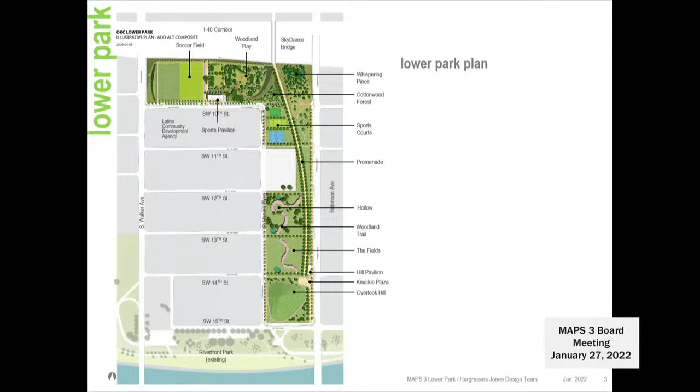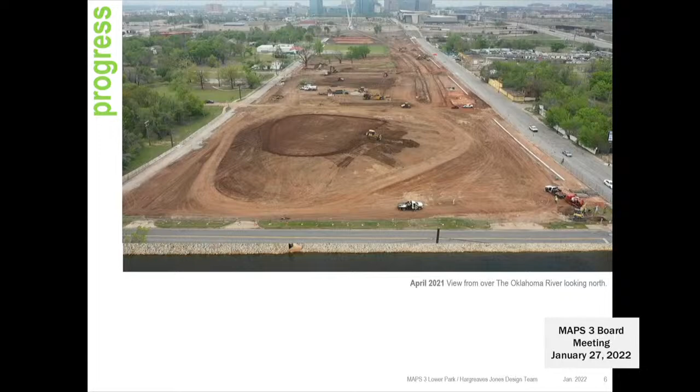I'm going to briefly talk about construction progress, and then a quick overview of the change order, the next item on your agenda. I'm happy to report construction progress has been very good. We've had a lot of luck with weather and no delays from utilities or underground obstacles that we were blessed with last year. This is earlier April last year to show how far we've come, where earthworks was underway, and September last year, where we got a little bit of sod on the hill.

These are drone images as we fly over, from south to north. We're flying over the hill here. You can see the promenade concrete work, some benches coming to the ground, the Hill Pavilion on Robinson Avenue, the meandering mid-block pathway, and the gray object is actually a rain garden that has no topsoil in it yet, which is why it looks gray.

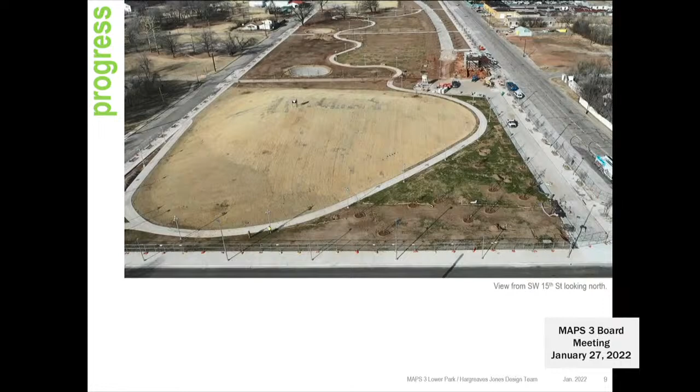We're flying over the middle of the park, looking at the large rectangles, which is the sub-base underneath the sports courts in the foreground, sized for 2 basketball courts. The middle ground is 4 pickleball courts, and the area with some gray is the futsal court, a very small soccer field.

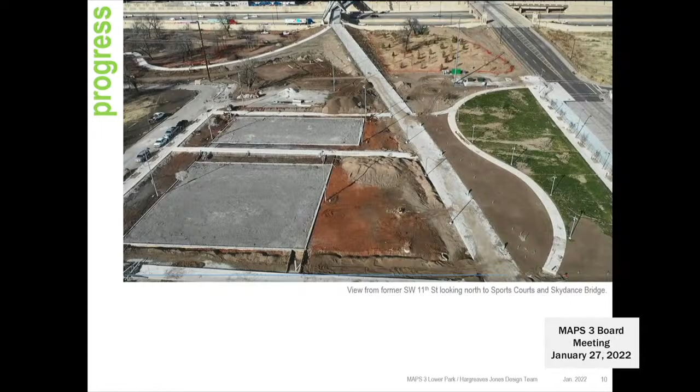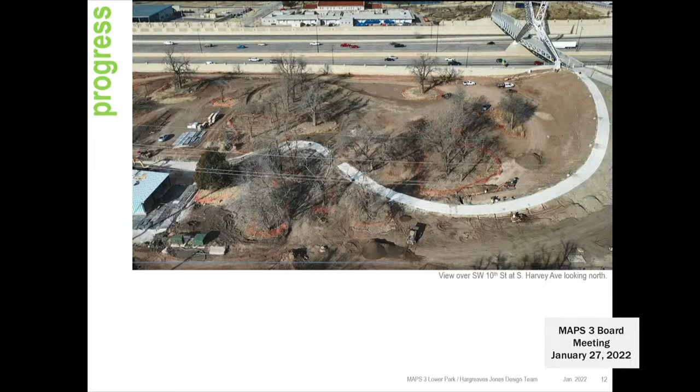You can see Skydance Bridge there, the path coming down from Skydance and heading west through the existing trees. We're flying over closer to Skydance, and you can see some of the irrigation going in. Moving west, you can see how that pathway moves underneath the trees, and the workers are busy in that area now. You can just start to see the sports pavilion, and here it is.

It is roofed in, the warmest place to work on site right now, so it's coming along very nicely. The last area to be completed will be the soccer field, which is that orange clay color there. We are receiving a donor contribution for the aggregate base, and that will probably go in the next 2 months.

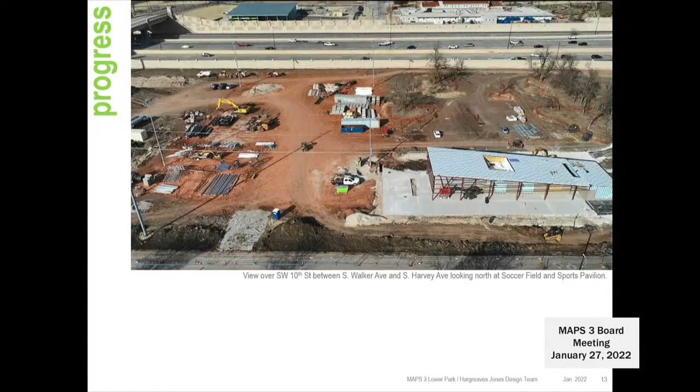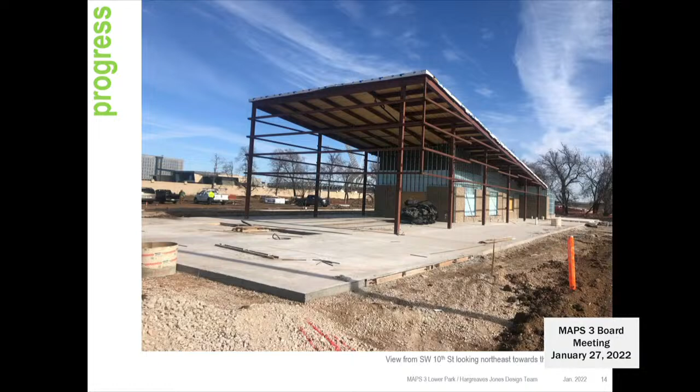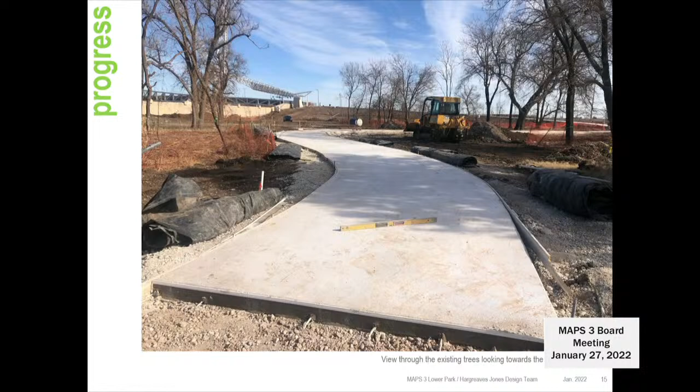So as we walk around on the ground, going backwards again, this is the sports pavilion on 10th Street, the framing of it, and the walls going up now. Concrete slab is down. The meandering pathway up to Skydance through the existing trees, which we spent many years saving as many trees as we could, and we're hoping to trim the damage from the ice storm off before spring as well.

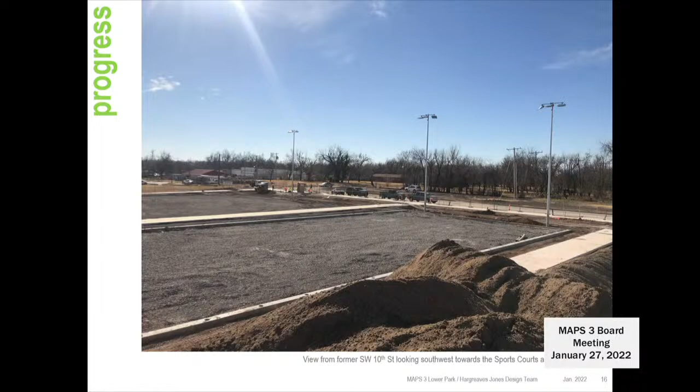Here we are looking at the sports courts, the pickleball court in the foreground, and the basketball courts in the background, on the promenade. It's very much a continuation of the upper park. You can see the normal lights on the left-hand side, and on the right-hand side, the bases for the stainless steel light masts by the art sculpture.

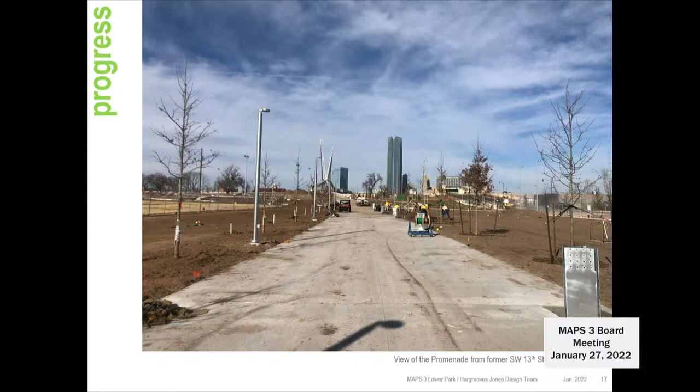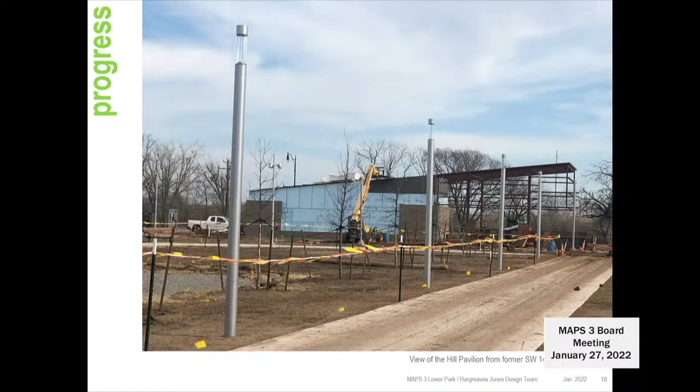This is the Hill Pavilion, the second building on the site. It's coming up nicely as well, a little slower than the sports pavilion, so as they finish the sports pavilion, you'll see this one be clad rather quickly now. This is the little plaza area next to the Hill Pavilion, which will be a location for public art.

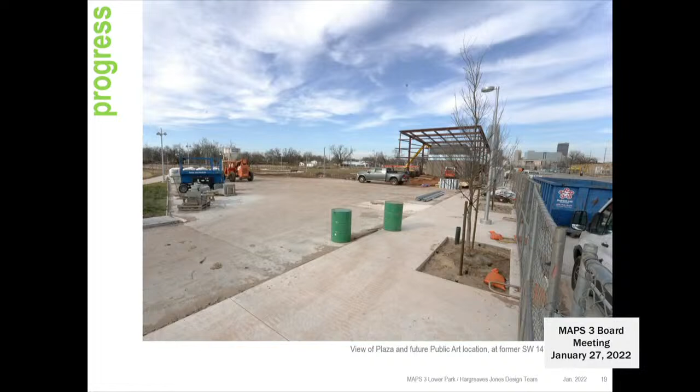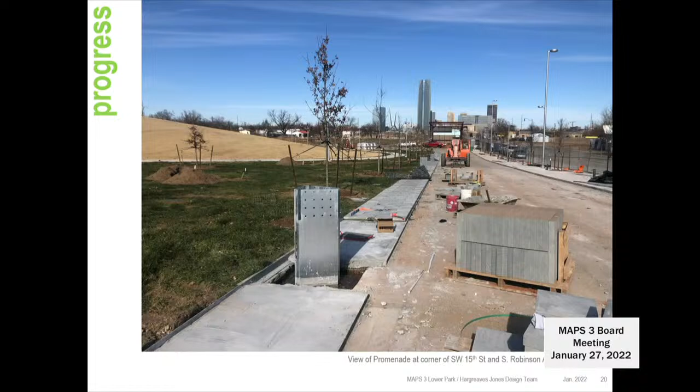And as we head south again, the stonework is just happening now for one side of the promenade, and concrete unipavers are soon to start. So progress has been very good, and we hope to continue with that through this year.

Just to give you a rundown of the change order, there's 6 items on this change order. The first 2 are credits back. One is to do with the earthworks balance - we were able to find places to use more dirt on site, so there's some savings back to the project. We were also able to value engineer some of the reinforcing in the sidewalks, and there's a credit due back for that. Item number 3 is relocating a valve out of a proposed curb cut ramp to ensure accessibility across the streets - there's $1,500 for that.

Item number 4 is to find newly laid OG&E utilities. Unfortunately, they did not put them where they said they were going to put them, and we've had to go find them. So there's a charge of $2,775 to locate those utilities.

Item number 5 is upgrading the security cameras. Since we did the upper park, City IT has changed the type of camera they use throughout the city, so we're upgrading the cameras themselves. And in discussions with the operator, they requested 3 of the cameras be removed and relocated from what was going to be attached to the buildings out into the park to get better eyes on the park. So there's a cost of $23,206 for that.